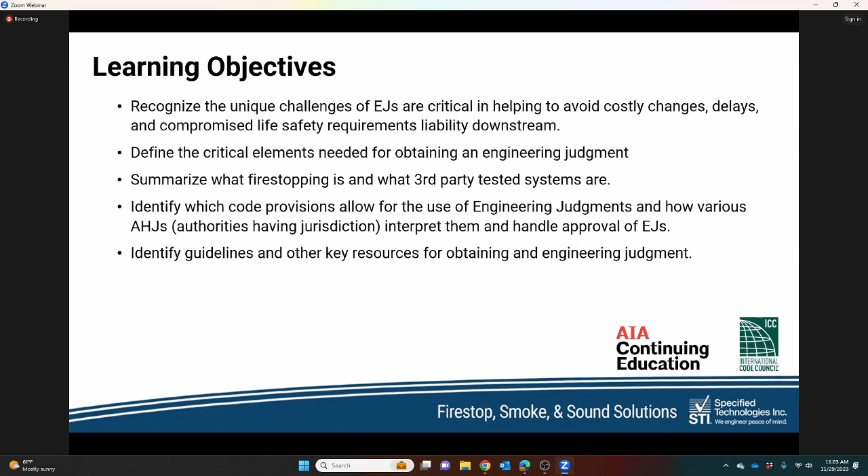So here's the agenda for today. First up, we're going to lay the foundation by understanding the premise of firestop systems, how they're crucial for safety and compliance in various settings. We're going to talk about engineering judgments in general. We'll show you some common applications, what they are, their vital role in firestop systems. We'll explore who's issuing EJs currently, how long they typically take, and how to obtain one.

And then moving on, we'll get into what stamping of EJs means and how that dovetailed into some new oversights on engineering judgments. And then finally, we'll show you some real-life examples before finishing up with Q&A and giving you some firestop solutions about how STI can help.

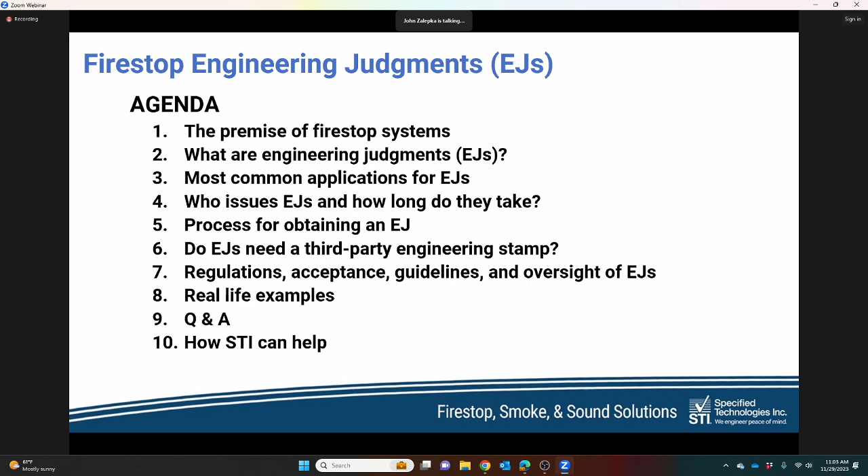So let's get into this. Firestopping systems are designed to inhibit the spread of fire, hot gases, and toxic smoke, essentially by sealing openings in walls, floors, roofs, anywhere there's openings. This is going to include any penetration, things like pipes and cables, ducts, also membrane penetrations when you have maybe a breach in just one side of an assembly, like an electrical box.

And of course, your different types of joints, whether that's an interior finish, gypsum wall joint, masonry joints, or at your perimeter with your curtain walls. The building codes are going to mandate that these systems undergo testing and receive ratings as an integral part of an assembly following an approved test standard that we're going to tell you about.

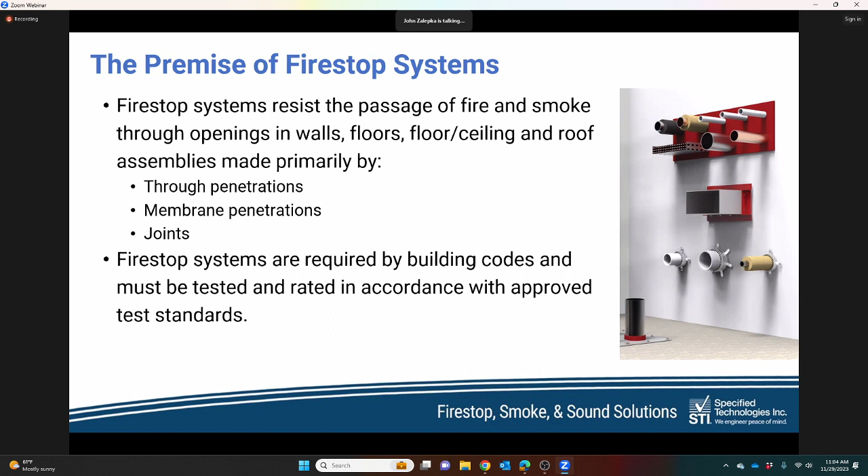So here we see some common examples of firestop applications. We can see a plastic pipe penetrating a gypsum wall, a curtain wall joint at that edge of slab. We see a typical header wall joint here where the gypsum board meets the underside of a steel fluted deck.

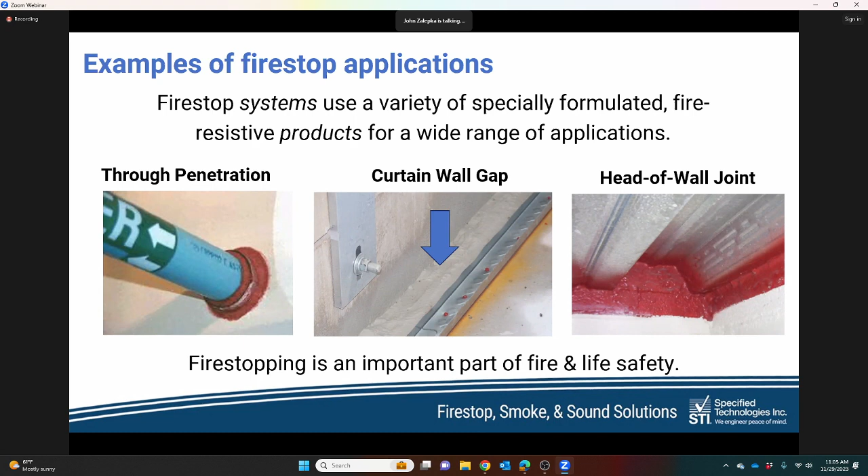These firestop systems use a variety of specially formulated, independently tested, fire-resistant products, and they seal these penetrations. They're put into your linear joint systems, and they're going to stop the spread of fire and smoke. Again, the emphasis here is on a system. Firestop products are just one component of that system, and fire stopping is a pretty important part of the overall containment of fire and life safety in a building when that does happen.

Firestop systems are tested and listed in independent laboratories. In North America, UL and ULC Intertek are probably the most common, but you'll also see listings for FM Global, and Southwest Research Institute down in San Antonio. All of these agencies have their own published online listings.

In the UK and other countries using British standards, Warrington Fire is well known, and there are many other relevant testing agencies depending on your location. The building codes are going to point to certain standards for fire stopping to be run at these independent third-party labs. The code doesn't say where the testing must happen, only that it must happen to a particular standard, and each of these labs can run to those respective test standards.

So here are those test standards. You'll see there's an ASTM and a UL version of the code referenced. If you think about ASTM, it's going to give you base standards for F ratings, your fire ratings, and your T ratings, temperature ratings. And then the UL version typically builds on that, giving us optional tests like W ratings for water tightness and L ratings for smoke leakage. And there's even some new M ratings for movement.

Essentially, the main test for penetrations is ASTM E814 or UL 1479. For fire-resistant joints, it's ASTM E1966 and UL 2079. Finally, for curtain walls or the perimeter fire containment system, ASTM E2307 is the primary test standard, although E119 is allowed under certain code exceptions. There is no UL version in this case for these tests.

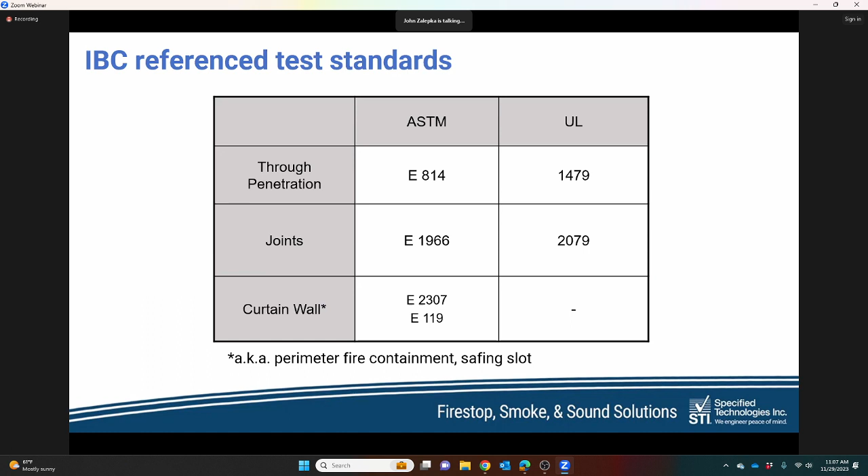So what is a tested or listed system? Well, this is going to refer to a penetration or a joint assembly, again, which is rated per the corresponding test standard that we just saw.

Here on the top portion is a simple pipe penetration system. You'll see the written description on the left-hand side there, it'll help you out. All the elements of a fire stopping system, including the assembly to which it's installed, comprise a specific and inseparable engineered unit that must be utilized as such. Now, the specific elements for each design become integral to the listing. So again, the products don't have ratings. The systems have the ratings.

So in this example here, we could see UL system CAJ1240. It's going to describe all the elements of a metal pipe penetrating a concrete floor or wall. And then with the minimum amount of concrete or the CMU wall, that gives us that combination system. We'll see sometimes there'll be optional steel sleeves, sometimes there's required sleeves. In this case, this one's optional.

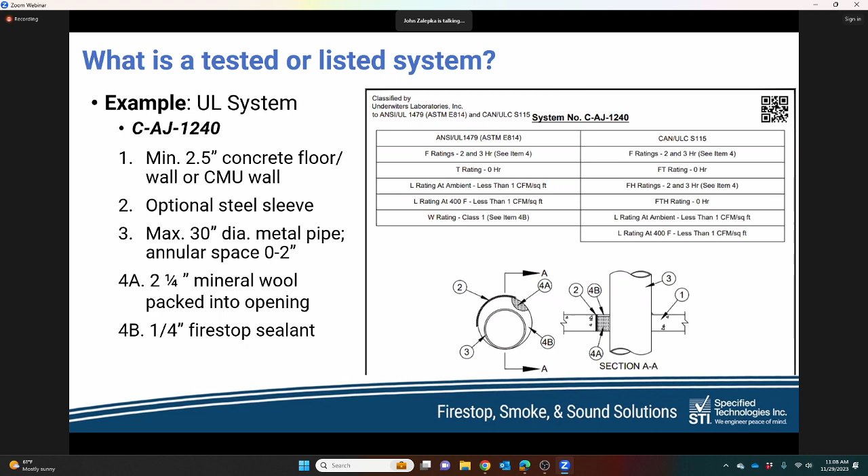This system allows for up to a 30-inch diameter metallic pipe with annular space, that's the space between the outside periphery of the pipe and the inside periphery of the opening, that can be a maximum of 2 inches. With 0, we see that's actually point contact, meaning that this pipe can touch one part of the opening. There's going to be some mineral wool packed in there, and then finally, there's some firestop sealant that's put in there on the top side of the floor or on both sides of the wall.

So now we can see that building codes require firestop systems to be installed and tested in accordance with the applicable standards by qualified test labs. These two sections of the IBC, the International Building Code, are examples. You can see through-penetrations shall be protected by an approved through-penetration firestop system installed and tested in accordance with ASTM E814 or UL 1479.

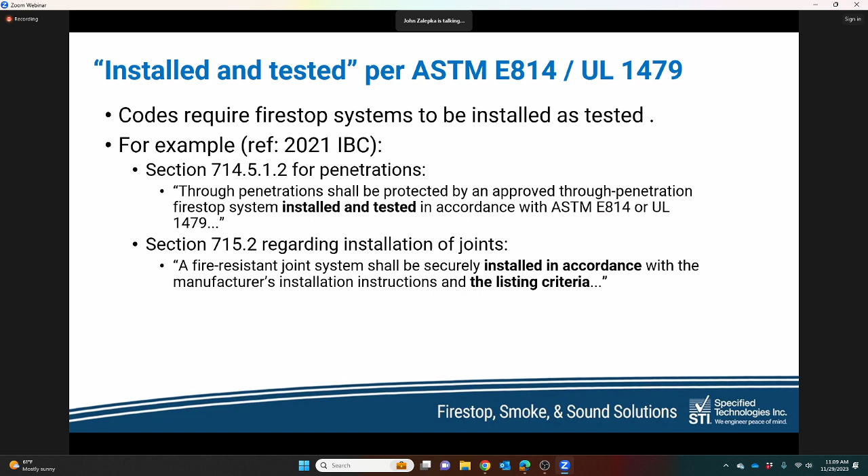And then for joints, you can see it's installed in accordance with the manufacturer's installation and listing criteria. So simply put, install firestop systems the way that they're tested or listed. Simple, right? Each system's like a set of installation instructions. But we can't test everything. There's no way to anticipate and test every single condition that's going to occur during the construction of a project or the life of a building. To put it nicely, unexpected things happen.

Construction is a complex process that requires an incredible amount of coordination and communication. And let's face it, it's not perfect. We all know what happens during the renovation of old buildings when walls and ceilings are opened up or removed. There's always some surprises out there.

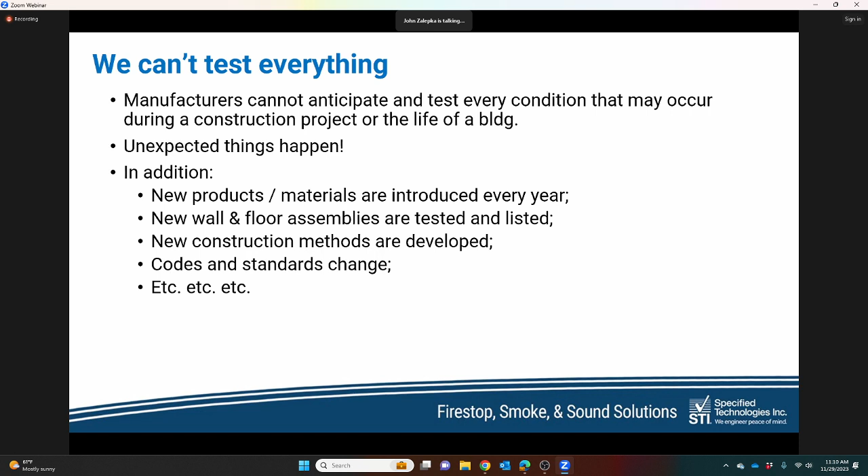In addition, there's always new products and new materials introduced every single year. There's new floor and wall assemblies that are always coming out, and construction methods change over time. Let's be honest, codes and standards also change. There's a 3-year code cycle. So it goes on and on.

So this is the reason why engineering judgments exist. It's because field conditions differ from tested systems. In this example, we have a hole that was cored in the wrong place, so a second hole had to be drilled. Now the opening looks like that little figure 8.

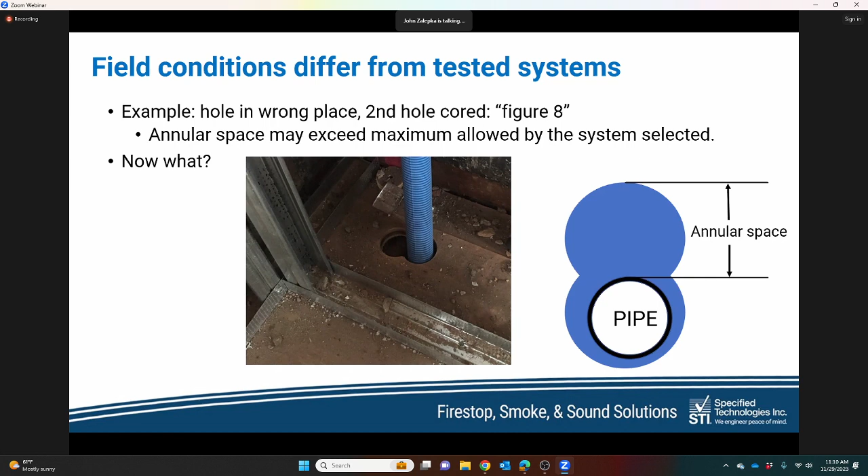We've seen them out there plenty of times, and it may no longer meet the parameters of a tested system that's been chosen for that application, because the annular space—that distance between the conduit and the edge of the opening—may exceed the maximum allowed by the system.

So now what do you do? Well, first of all, you try to find yourself a tested system that does satisfy the field condition. You can look on UL's website called Product IQ, Intertek's directory of building products, or even manufacturers' websites. Or you can contact the firestop manufacturer directly. In the case of that figure 8 example, there are systems available for larger openings.

However, on almost every single job site, situations do occur during construction for which there are no tested systems available. So then you move on to step 2. If there's no tested system for the condition, either modify the condition—easier said than done a lot of times—or request an engineering judgment.

When I say modify the condition, we mean something construction related: move a pipe, reduce the size of an opening, extend a wall, move a penetrating item. There are so many different things, but modifications aren't always possible and they're not typically practical. And that's why we as manufacturers get called for engineering judgments to be requested.

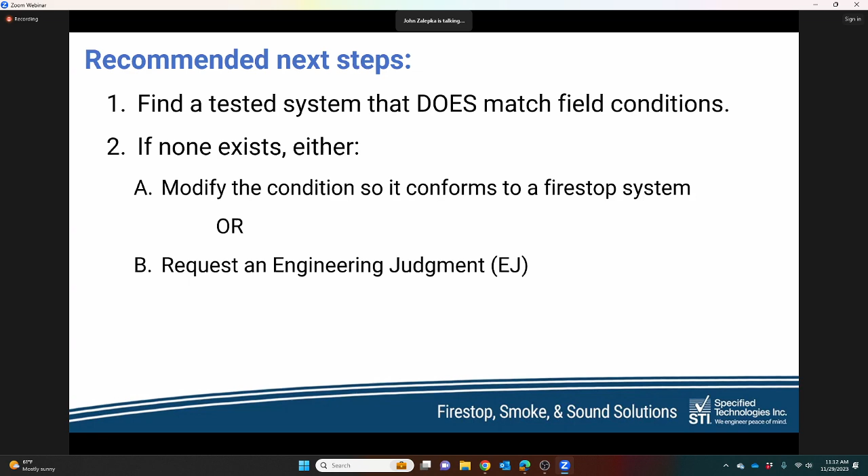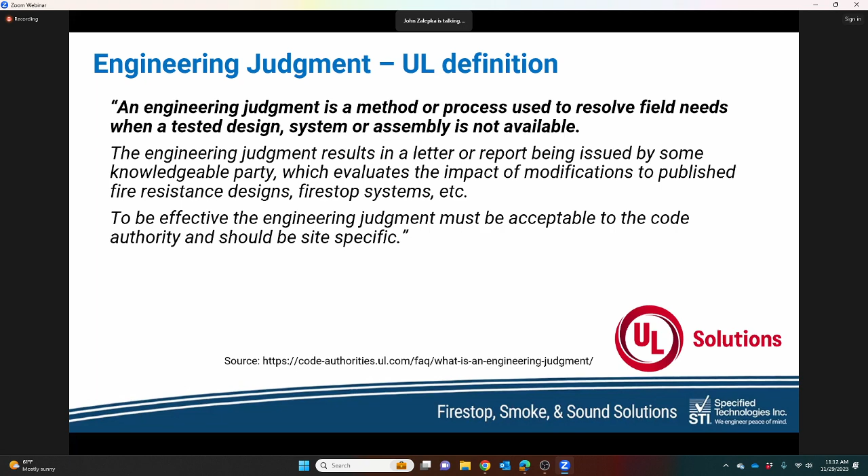So there are several different definitions of engineering judgments. UL's definition, found on their website, is broader than just firestop systems—it addresses any fire-resistant design, assembly, or system. It simply states that an engineering judgment is a method or process used to resolve field needs when a tested design, system, or assembly is not available. It goes on to say it should be done by someone knowledgeable, be acceptable to the local authority having jurisdiction, and be site-specific, which is an important part we'll come back to later.

The IFC, the International Firestop Council, also has a definition, which you'll see on the next slide. In fact, the IFC has a multiple-page guideline for engineering judgments, which is excellent. But first, if you're not familiar with this organization, IFC is a not-for-profit association for manufacturers, inspectors, and users of fire protective materials and systems. It's a terrific source of information on all things fire stopping.

The IFC has a document available on their website called Recommended IFC Guidelines for Evaluating Firestop System Engineering Judgments. Within these guidelines there's a definition of engineering judgments. To paraphrase, it says: when field conditions differ from original design purpose, alternative methods—sometimes referred to as engineering judgments or EJs—apply. In Western Canada, EJs may commonly be known as TEs, or technical evaluations. We'll get into the different names for that a little bit later.

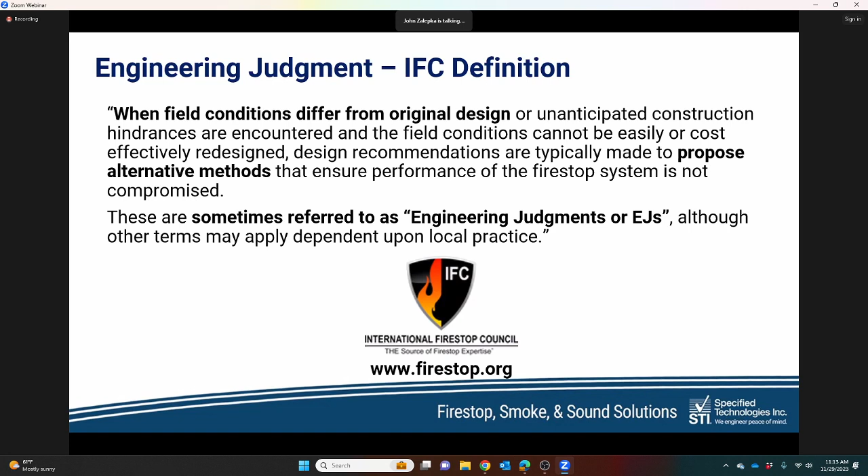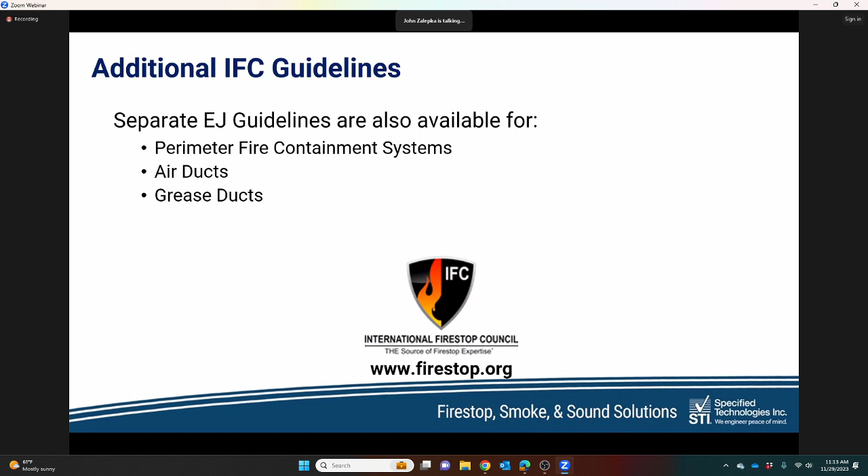The IFC also has EJ guidelines specifically for perimeter fire containment systems—that gap between the edge of slab and your exterior walls—air ducts, and grease ducts. However, for the purpose of this webinar, we're going to focus on firestop systems, which include penetrations, joints, and perimeter fire containment systems.

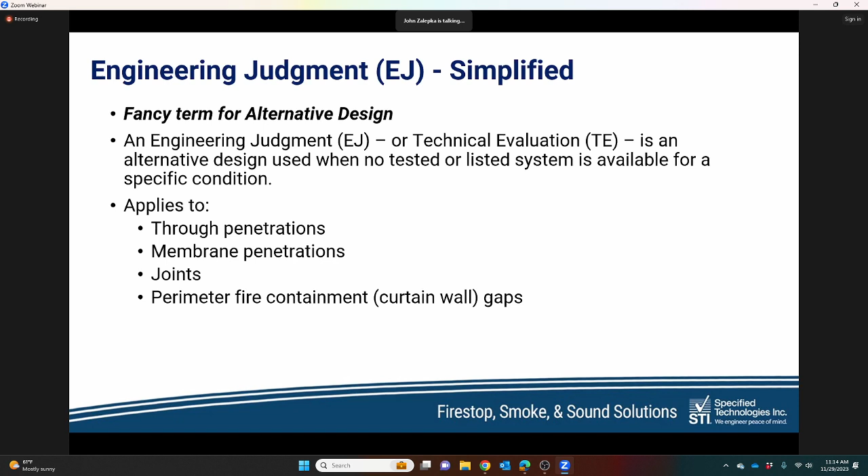So I like to think of engineering judgments as just a fancy term for alternative design. EJs are a really quite simple concept, but it's important to understand how they're done and by whom, as well as the regulations that affect them, because they're an important part of fire stopping as well as life safety and liability. No one likes that word.

But let's talk about the building codes for just a minute here. Although the codes do require firestop systems to be tested in accordance with approved standards, alternative designs are allowed in IBC section 104.11. Codes are not designed to restrict the use of material, design, or method. However, alternatives must be approved by the building official. So although alternatives are discouraged in favor of tested systems, there are situations where they can't be avoided.

Take CLT, or cross-laminated timber construction, for example—it's also your heavy timber, your mass timber—and we'll see CLT construction is now allowed by the IBC for high-rise buildings.

However, at the same time this was published, there were no listed fire stop systems available for CLT. Fire tests were in progress by manufacturers, but it's more challenging compared to using concrete, masonry, or drywall due to the combustible nature of wood.

So UL developed a new category, which was published in October of 2022. You'll find a limited number of fire stop systems using CLT walls and floors on Intertek's website and UL. But by the end of this year and beyond, there's going to be plenty more. We actually have quite a few that have just dropped.

If you look at IBC section 104.11, it basically states that alternatives shall be approved where the building official finds that the proposed design is satisfactory and complies with the intent of the code, and that the material, method, or work offered is not less than the equivalent of the prescribed in the code. In other words, it has to be at least equal to the code, and it has to be approved by the building official.

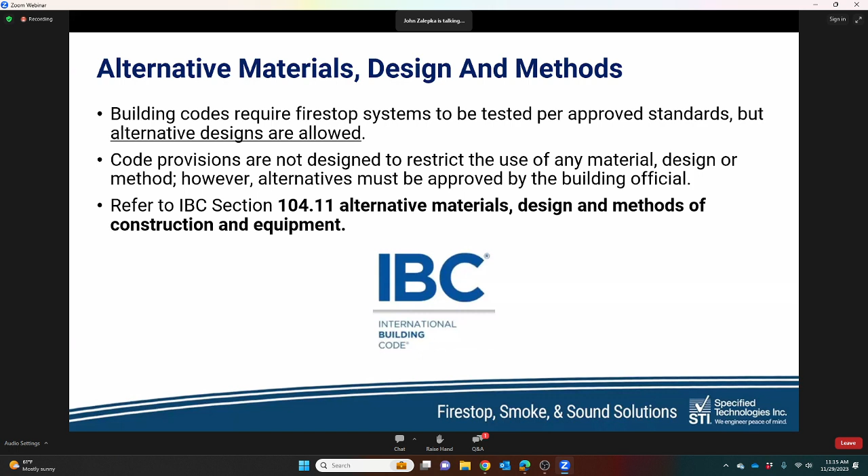In Canada, alternative solutions are also allowed by code, the National Building Code, NBC. Western Canada tends to lead the code enforcement, and if you're in Alberta, Calgary, Edmonton, you're familiar with Standata, a separate organization which publishes information bulletins, guidelines, and reports. If you deal with British, European, or other codes, you're going to find that alternative solutions are allowed there as well. It's good practice to use tested or listed systems whenever possible, but also allow alternative designs when necessary under the guidelines approved by whatever your local authority having jurisdiction is.

So let's get into who issues engineering judgments. Fire stop manufacturers typically issue them upon request, and there's typically no charge for this. It's part of the business. However, only qualified technical personnel should issue them.

EJs may also be issued by architects, fire protection engineers, knowledgeable registered professional engineers, or some independent testing agencies that provide listings for services like fire stop systems, like UL or Intertek. Some architects are also very knowledgeable about fire protection and design alternative elements for construction on a pretty regular basis. But with firestop, it's best to at least involve the manufacturer, because it's the manufacturer that knows how their products behave in a fire, as well as the full test assemblies, because let's face it, that's what we do. We conduct or witness fire tests all the time.

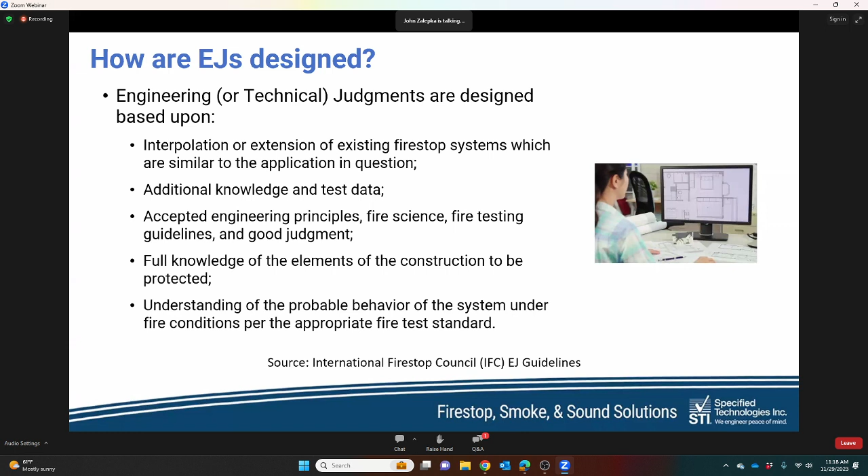So what do engineering judgments look like? We're going to show you some examples in just a moment, but they all look pretty similar to tested and listed systems. However, they should be clearly identified as engineering judgments. They're normally presented as one or more illustrations with a detailed description, just like a fire stop system, but illustrations are not required, and they may be in written form only. There's no rule that says you have to have a drawing. Again, most do, but it's not a requirement.

But an EJ should also include a clear direction for the installation of the recommended system. What was it based off of? Cite the tested systems again. Identify the project name and location. It's very important that this has to be site specific. It can't just be a general engineering judgment, as well as the company that it was issued to. So who's the responsible party?

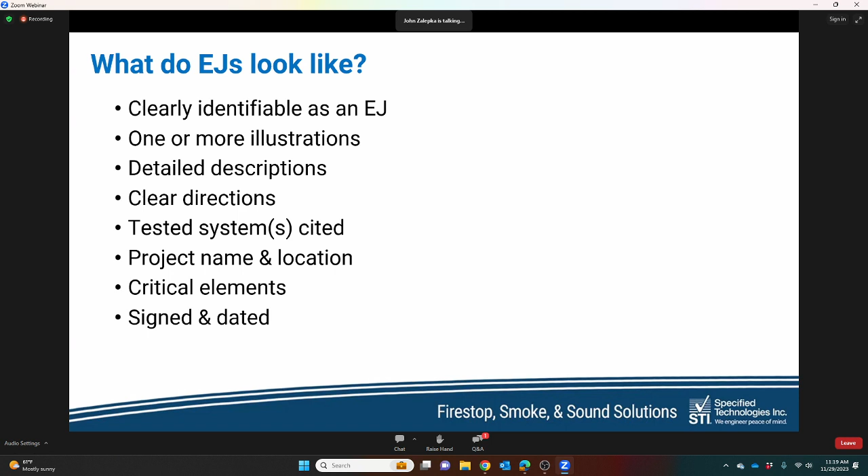It needs to provide a complete description of the critical elements needed for the fire stop configuration, and it needs to show the date, the issue, the signature, and the person's name that issued this engineering judgment.

So here we could see an example of an EJ that was done for a pretty large opening with multiple insulated pipes penetrating a 2-hour shaft wall. Generally shaft walls shouldn't be penetrated, but sometimes it's necessary or it happens. So there are tested systems for insulated pipes through shaft walls, but they're pretty limited. In addition, these were steam pipes, and the insulation was up to 4 inches of fiberglass, which is unusually thick.

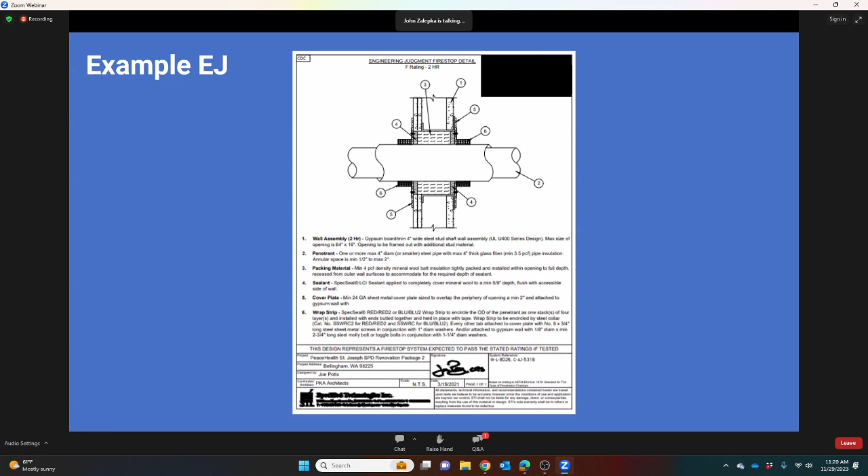So at the top you can see a drawing, the fire rating — 2 hours in this case — and the engineering judgment number, which has been hidden for confidentiality. The main reason for this EJ was the insulation type and thickness. Glass fiber insulation breaks down in fire, and if it's not fire stopped properly, it can allow the fire to spread through that wall.

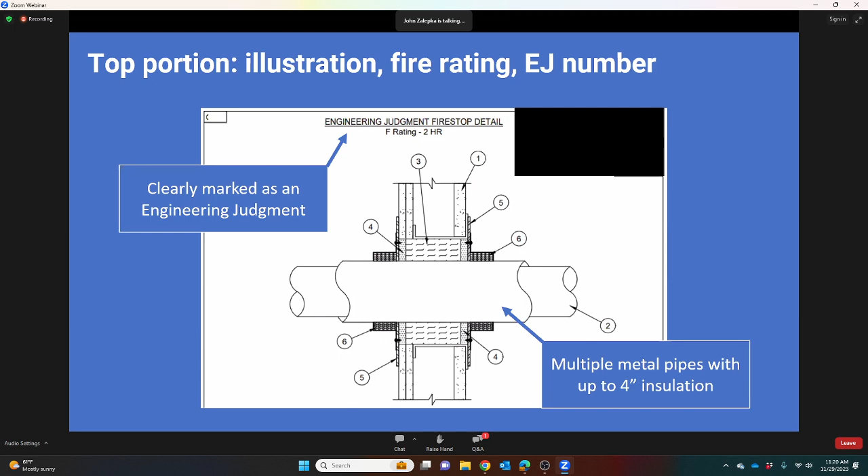So fire stop collars were required around the pipe in this case, and these collars are going to expand into the mess. When the fire hits it, it's going to close those gaps left by the consumed pipe insulation and any gypsum wall that may have broken away.

So in the middle section, the engineering judgment has all the written descriptions — the wall assembly, what it's made out of, the penetrant, packing material, any sealant, the steel cover plate, and in this case the wrap strip with the steel collars.

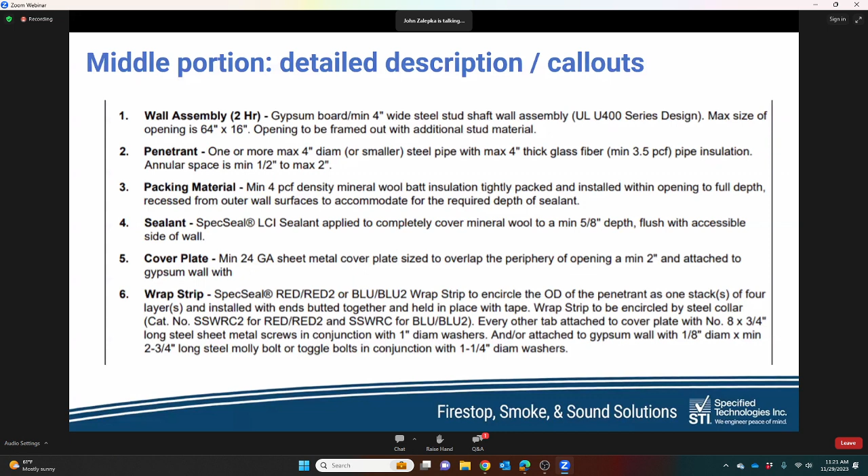And then finally, the lower section looks a little bit like this, a title block. It's going to contain information including the project name and location, the engineering judgment designer, the responsible party — usually a contractor or an architect — the signature, the date, and again any referenced fire stop systems that judgment was based off of.

But if you asked our engineering team about this, joints and curtain wall systems seem to take the most time. They are the most complex, the most difficult situations to deal with, and there's a lot of different variables when it comes to those joint systems.

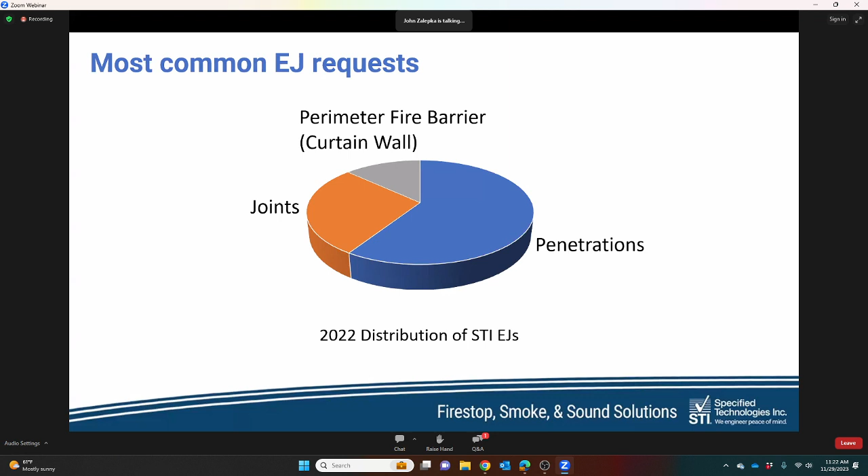So how do you submit a request for an engineering judgment when you can't find a system? Most manufacturers are going to have some type of standard form, usually online. However, each company is different, so just ask what their process is. A standard form can act like a checklist — it could help you collect all of the relevant required information.

In a minute we'll show you what's required for each type of application, but in addition to information you can provide — such as plans, photos, sketches, notes — anything would help a great deal. Any information you could give to understand the situation better will provide an accurate EJ for you that's going to reflect your actual real-world field conditions.

So what information do you need to request an engineering judgment? Well, first of all, EJs again have to have the name and the address of the project. I can't stress this enough — we can't just write a blanket engineering judgment. Remember, codes require EJs to be project specific as well. It can't be reused on different projects without submitting it for review with respect to that current project in question.

A lot of times people try to get EJs written before a project even starts. That should never happen. All EJs also should note the responsible party — for example, if it's an architect, an engineer, or the contractor, even a building owner sometimes in the case of maintenance work or remodeling. Now, for penetrations, you're going to need to know the type, the thickness, and the fire rating of the wall or floor that you're penetrating.

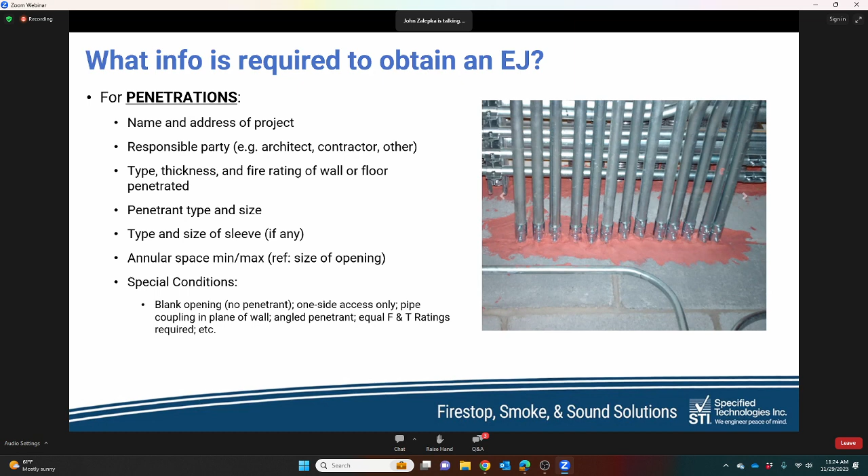Maybe something was cored and you didn't need it. Maybe a pipe was taken out. If you only have one side access, this is helpful to know as well. Pipe couplings, if that's in the plane of the wall, any type of angled penetrant, equal F&T ratings required, anything that we need to know to help you along there. That's what we would need for penetrations.

When we're dealing with joints, this is what we would need to know when you are looking at joints. Again, name and address of the project, responsible party. Then for joints specifically, we need to know the type of the joint. Is it a head of wall joint, a wall to wall joint, floor to wall, bottom of wall?

What is the type and thickness of your different assemblies? What are they? You need to know what these adjacent assemblies are. Is it a brick wall going to a gypsum wall, or the underside of a floor? What is the joint width? And then again, any special conditions here with joints, typically they are designed to allow for movement. So what is the movement capability of the joint?

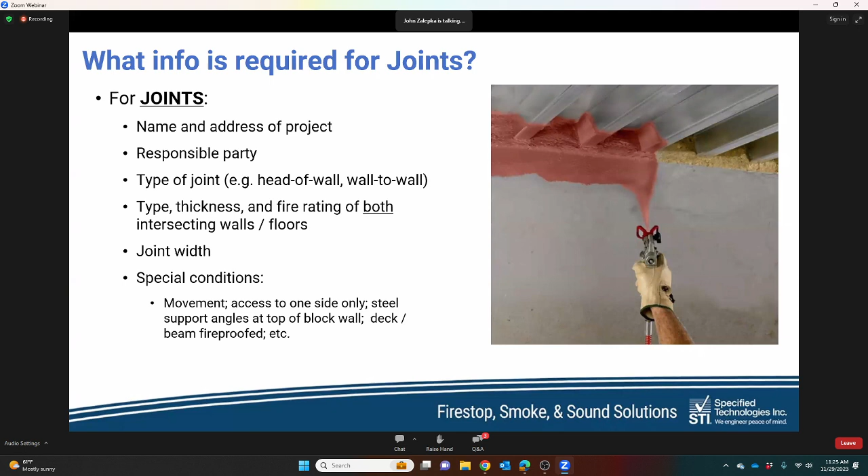Access to one side, again, if you only have one side access, sometimes the answer here is a stuff spray kind of thing. Any kind of steel support angles on the top of a block wall that might be in the way. If there's fireproofing on a beam that might be penetrating somewhere, all of this we need to know.

And then finally, for your perimeter fire containment systems, EJs, we always start with the exterior wall. One of the assemblies here is not rated, and that's typically that wall that's made up of things like aluminum that melts and glass that breaks. So what is that wall made out of? We need to know, is it precast, GFRC?

What type of floor are we dealing with? And the thickness of that floor. What is the fire rating of the floor? Typically, you have 2-hour, but sometimes you have a 1-hour floor. Sometimes you have a 3-hour floor. So need to know the rating of the floor.

Joint width, obviously, this is going to factor into how we're going to deal with that little gap there, or maybe not so little. Any sill heights, special conditions, again, your movement here, wind sway, dynamic, static. Sometimes your curtain walls can be a static system. Do you have anchors that are mounted on the top? Are they in the middle? Are they bottom side anchors, steel back pans?

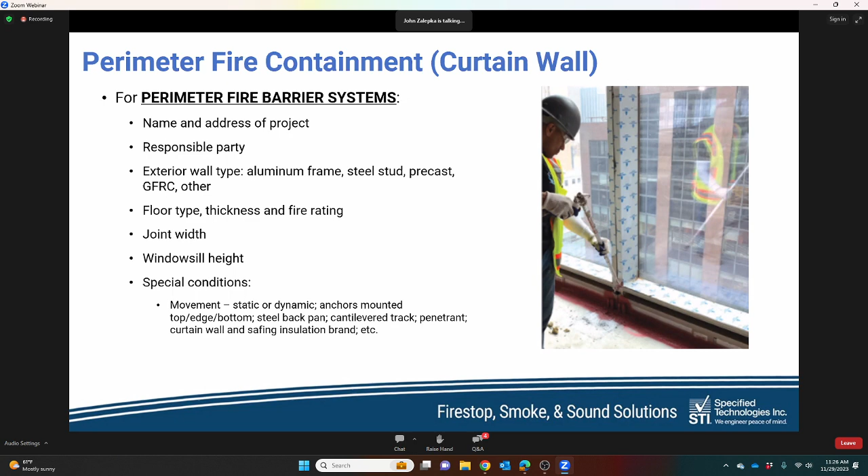Again, anything that you could tell us about that panel and any conditions of the floors will help us along the way.

So how long does it take to get an EJ? Well, this is going to depend on a lot of different factors, but when you're in the middle of a project, EJs can cause construction delays that, if not handled efficiently, really could put a damper on the profitability of your job. So we understand as manufacturers that turnaround time is very critical, but it's always going to depend on having the most clear and complete information.

This is the number one reason for delays. The complexity of the application is always going to factor in there. The efficiency of your manufacturer's process and their technical personnel, the volume of EJs at the time of request, any number of changes, corrections going back and forth, and any number of factors could really take some time there.

But STI, we've set the bar pretty high in the industry. We typically turn around EJs in 24 hours or less. In fact, there's many that turn around in just 2 or 3 or even 4 hours. However, there's times of years that are busier than others. For example, March and April tend to have a pretty high demand for EJs.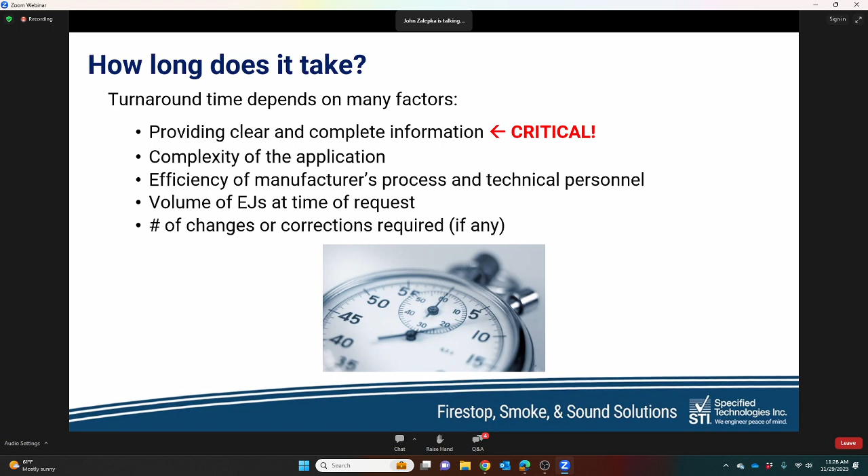So when you make a request, try to put yourself in the shoes of the other person who's designing it. If they don't have all of the information, they're not on site, so they don't have that advantage. So they're going to rely entirely on the information that you provide. So again, use details, photos worth 1,000 words, right? Notes, hand sketches, very helpful in understanding your actual field conditions. And this is critical in order to design an EJ that meets your needs and satisfies the code.

So do EJs need to be stamped by an engineer? This is a great question. And the answer is generally no, but it depends entirely on the jurisdiction. Some AHJs do require a licensed engineer, and in some cases, a fire protection engineer, to review and stamp your EJs. On this slide, there are a few examples of this, but again, this is not an exhaustive list.

Requiring EJ stamps is a strong deterrent against the use of them due to the time and the cost. And if you ever wonder why jurisdictions require this, the reasons are going to vary, but the predominant theory is twofold. The first is simply to discourage the use of EJs, and two is the lack of trust in those who are providing them. Now, that doesn't mean that they don't trust manufacturers in general, but it only takes one bad apple to spoil the bunch. In other words, it only takes one person who may not have been qualified at some point in time to issue an EJ, and now there's this bad spiral, bad loop.

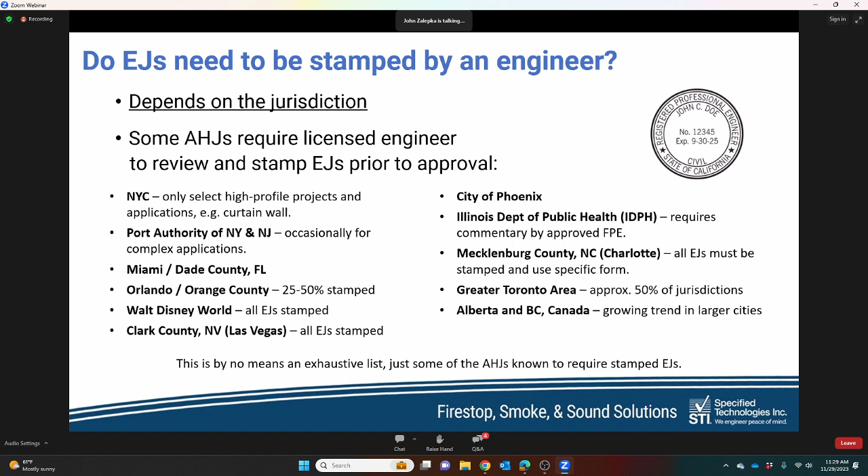So here you can see some of those jurisdictions, and the cost of getting EJs is going to vary depending on the engineering firm as well as the complexity of the application. In our experience, we've seen engineering judgment stamps for around $600 to $1,000, but I've seen them top $1,500. For example, imagine a large project where you have 100 EJs; it could be $60,000 or more just for the review and stamping of those EJs.

So why don't manufacturers just stamp them? Well, the reason is the manufacturer is not considered an independent third party. So when needed, we can refer you to some engineers who provide the review and the stamping that are licensed in all 50 states. Some of them are licensed internationally as well. So if you need that, just reach out.

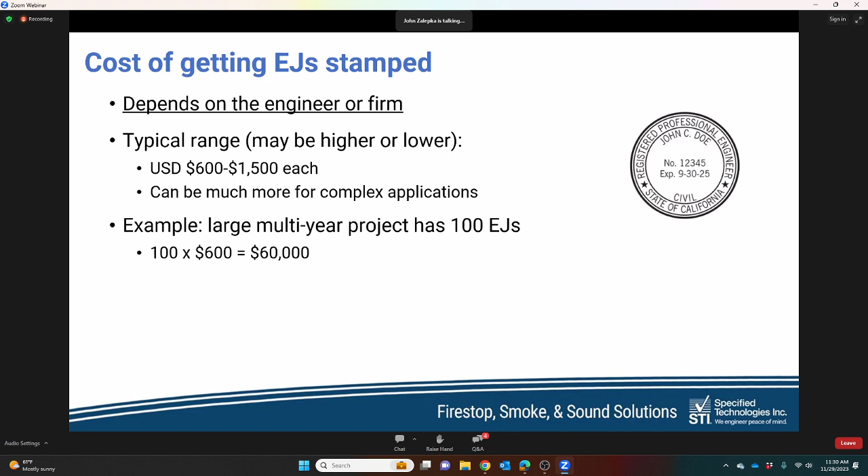There are some AHJs who do not allow EJs for new construction. Again, I mentioned this. Sometimes we're asked to do an EJ before building even starts. So this isn't going to happen in certain jurisdictions, at least during the design and the permitting phase. Now, contrary to what you may think, most building officials are pretty reasonable. We've all heard some stories about some that weren't, but in my experience, most are pretty agreeable to reasonable solutions when problems occur during construction.

But for new construction, one reason some jurisdictions stopped accepting EJs is that too many plans were being submitted for new buildings with dozens of EJs before construction even started. This goes well beyond firestop, and they just grew tired of this, and who can blame them? Their job is to enforce the code, and in many cases, the code was being ignored and substituted with less expensive alternatives as part of the original design. So from that point of view, it's easy to understand why a building official might have that position.

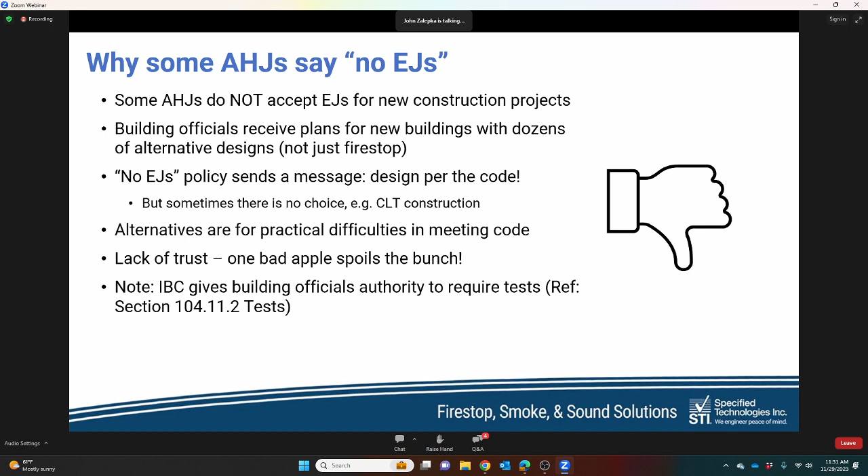EJs are meant for situations where there's no tested assembly, and theoretically, that should only occur during construction, where all kinds of unexpected things happen. But nothing's that black and white, and every project and every jurisdiction is different.

So now let's take a look at some real world examples of recent EJs. This was an example of an existing prison where the AHJ was very strict on code enforcement. The wall was a shaft wall, so there was only access from one side, and the joint was concealed by a continuous steel angle and fireproofing. You'll see that better in the next slide, but you might look at that and think there's enough for a 2-hour rating, but there's no tested system for it. And the area above the wall was concealed, so no one really knew what was behind that angle. This is a good example of good notes and a clear drawing, and it's very easy to understand the basic situation here.

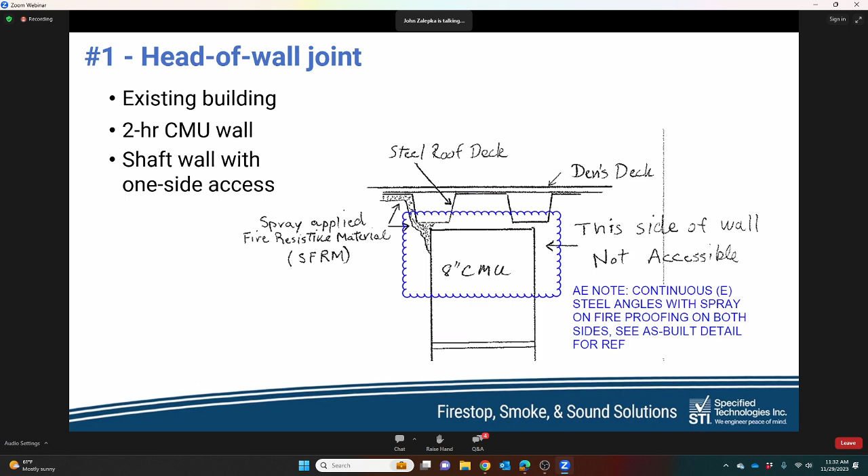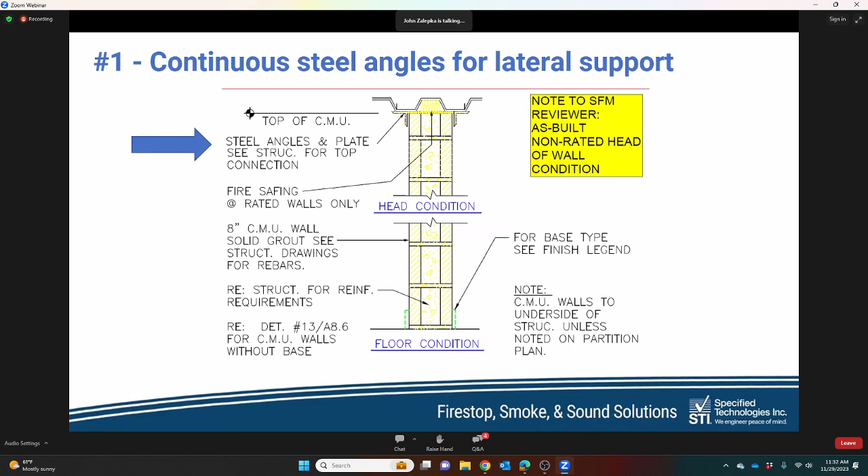Here's some additional information that was provided. It shows that steel angle at the top of the wall. They were installed for structural connection and inmate security. It's a pretty dark photo, but if you look closely, you'll get a sense of the condition that they were facing. There's some missing fireproofing, as noted there. The head of wall joint is also covered with spray-applied fireproofing. So the goal was to provide 2-hour continuity of the wall all the way up to the underside of the roof.

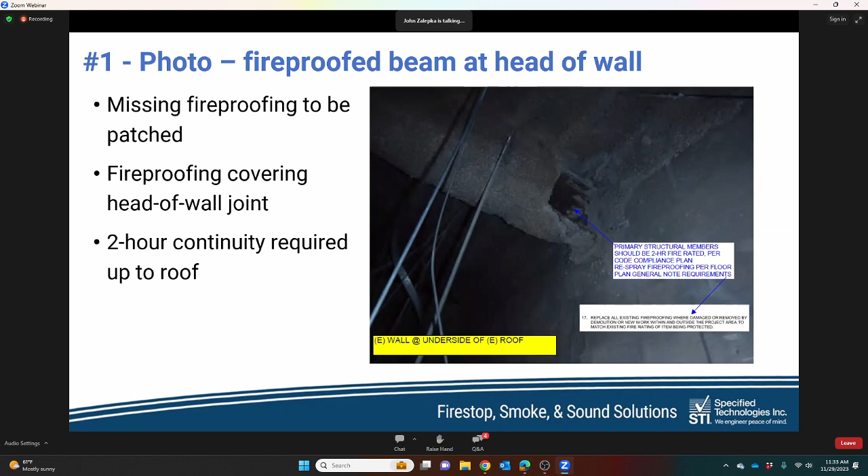So the solution in this case, which was a collaborative effort with the architect and the contractor, was a gypsum shaft wall construction like a soffit with fireproofing where it meets both the wall and the underside of the roof. The steel angles were not touched.

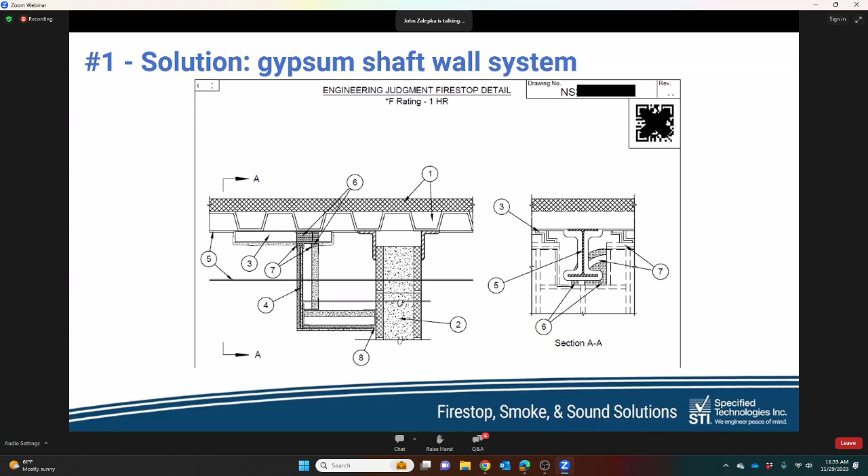So here it is in a little bit more detail. You can see that there was a sandwich type of fire stop system. Again, which I mentioned a little bit earlier, stuff spray. You had some mineral wool backing and fire stop spray above your shaft liner. And then you had some fire stop sealant down there at the bottom.

So this system took some back and forth to get all the details correct, to satisfy the fire marshal and to be confident that it could be constructed properly.

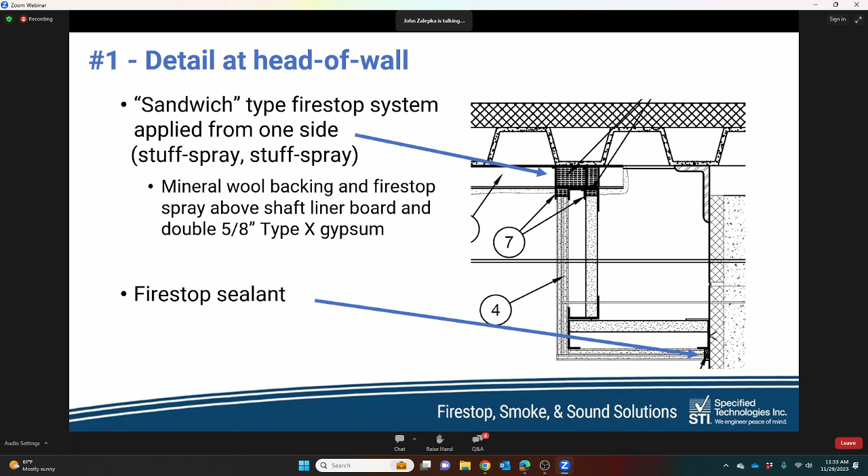So here's another example. This was a relatively simple condition once you understand it. You're looking at an elevation view of an exterior window wall with GFRC spandrel panels, and the gap is between the edge of slab and the wall. It was about 8 inches wide, and it was filled with fire safing or mineral wool. Looks pretty good on the surface, but there were 2 issues.

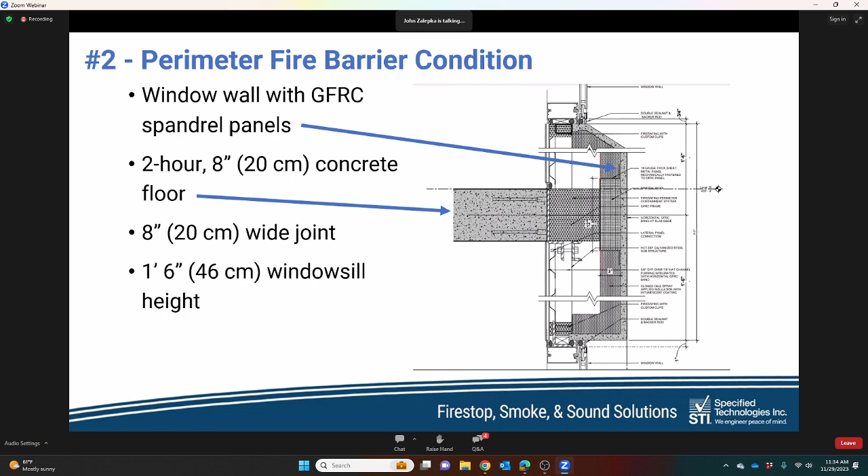First, there's a metal panel fastened to the inside face of the GFRC panel. It's filled with mineral wool, but that's not part of any tested system. And number 2, although there's fire safing in the joint between the edge of slab and the metal panel, the density and the compression were not called out, and there's no fire stop sealant or spray for your smoke seal, as well as fire and hose stream resistance, which is part of the test.

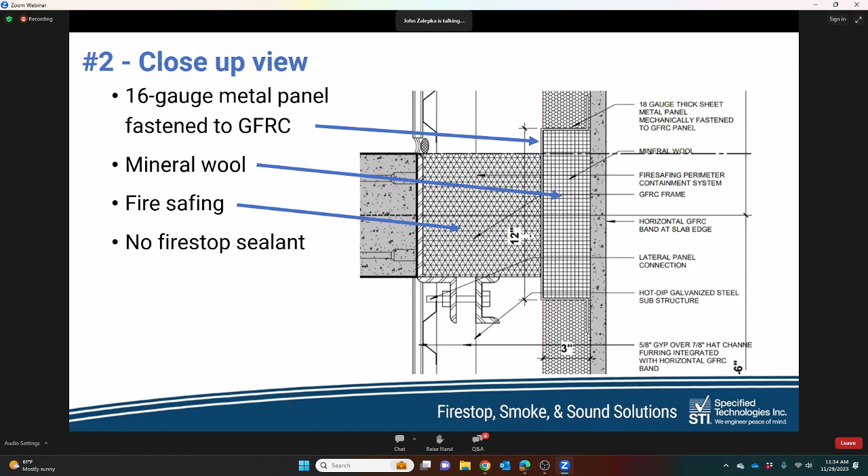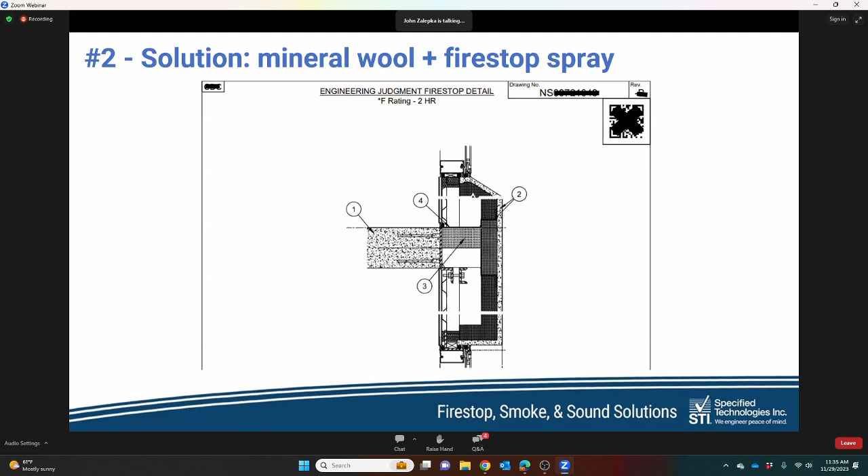So the solution in this case was essentially to add a Firestop spray over the fire safing and call out the mineral wool density and compression. So the next slide will show us that in a little bit more detail. We see here there was a minimum depth of 4 inches of mineral wool with a 4-pound density, and it was required in the joint to be compressed at 33% between the edge of slab and that metal panel, and then sealed on the top with a Firestop spray.

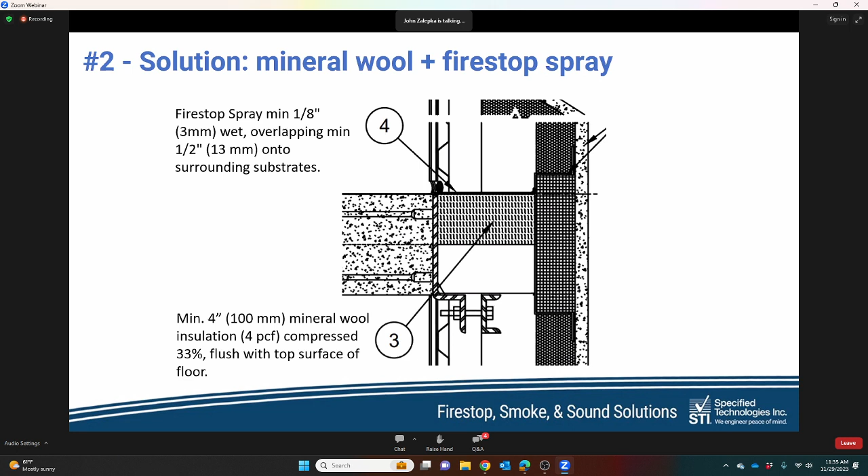Here's our third example. This is a membrane penetration. In this situation, there's a 2-inch diameter steel conduit penetrating one side of an existing wall made of lath and plaster. The wall consisted of 7/8 inch plaster on metal lath on both sides for a total wall thickness of 5 inches. The building was an older hospital.

It was built, I believe, in the 1950s, just before drywall started replacing lath and plaster as a quicker and easier installation option. And since modern-day Firestop testing didn't begin until the mid-1980s, there aren't any tested or listed Firestop systems using plaster walls. However, that doesn't mean that plaster doesn't have a fire resistance, because it does. In fact, the IBC has a table of the rated fire resistance of various walls and partitions, including plaster. So if you're interested in learning more about that, refer to IBC sections 719, 720, and 721.

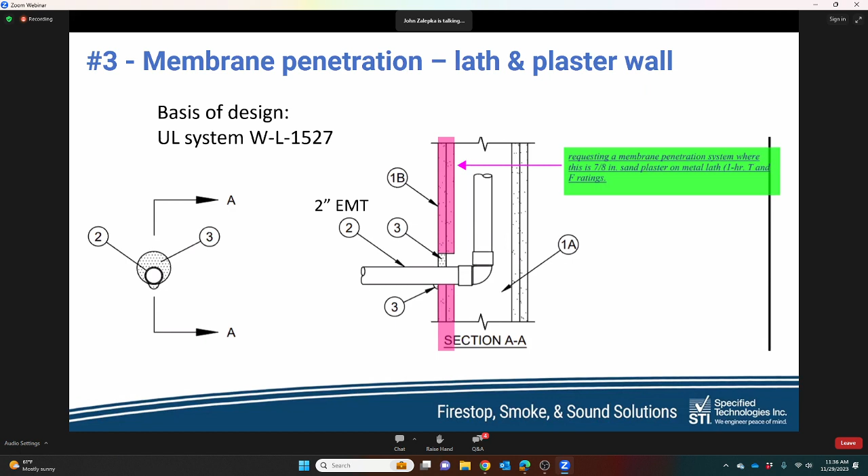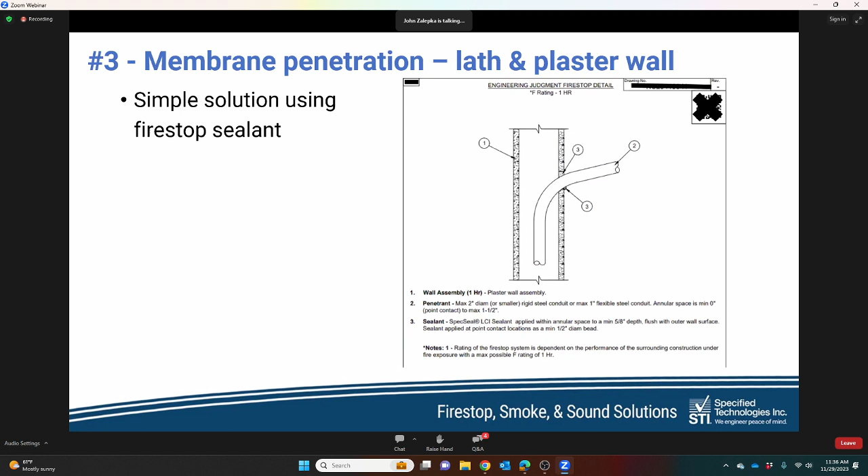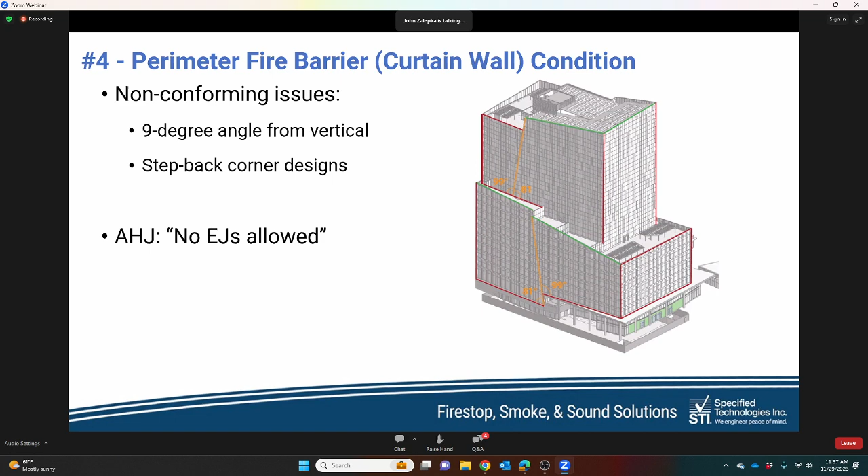So the last example here, this building had some curtain wall conditions that did not conform to any existing system due to angled walls and some special corner designs, and code enforcement on this was very strict. In fact, the building official was not accepting any engineering judgments, but we tried anyway because we were confident we could provide a design that would pass 2 hours and convince the building official that it would perform well.

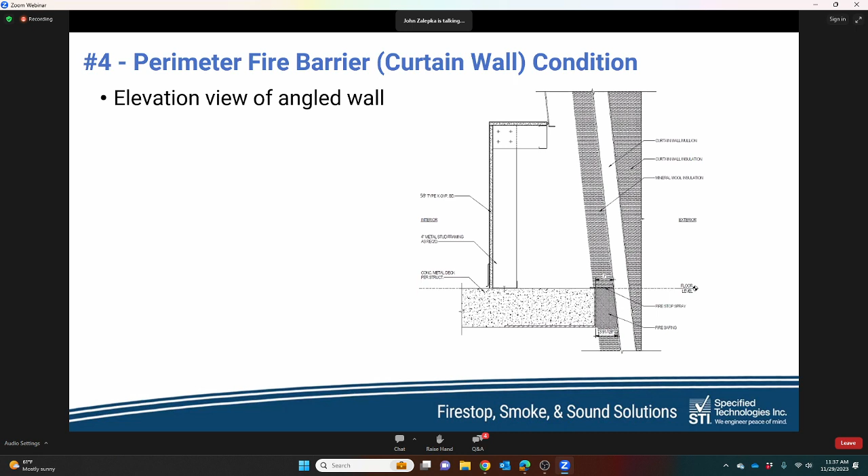Here's an elevation or a side view of that angled wall passing by a concrete floor. And here's a plan view looking down at a typical floor, showing a step back corner. The darker shade part is the joint between the floor and your curtain wall. There were also 2 different types of glazing systems planned for this project. You can see those here.

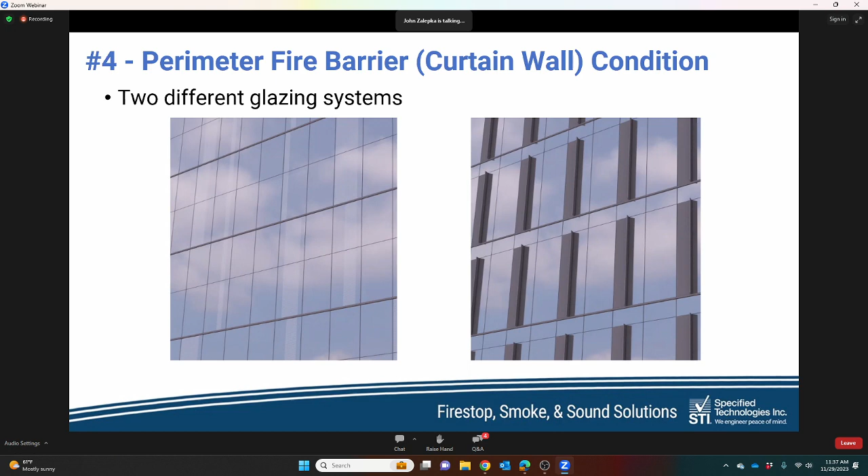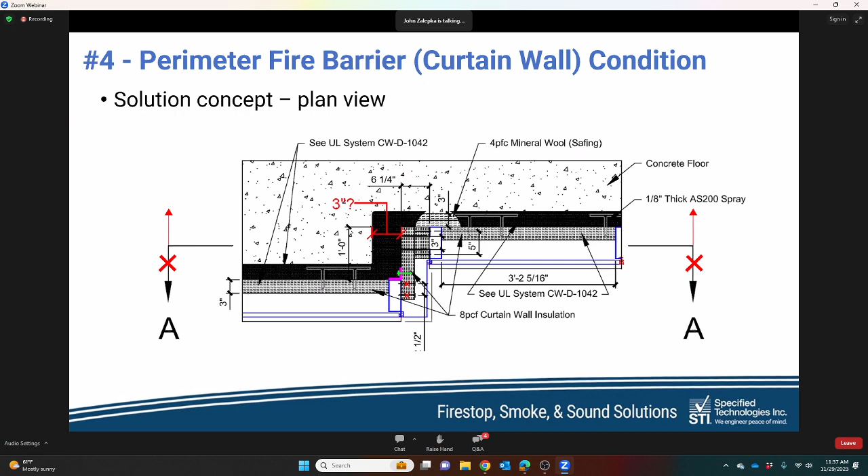So this is a draft of a solution. At this point, we were still collecting information from the architect and the general contractor and going back and forth on a proposed design. You can see some of the redlining on the drawing. This was not a final design yet. We felt the condition was reasonably similar to other tests that had been done.

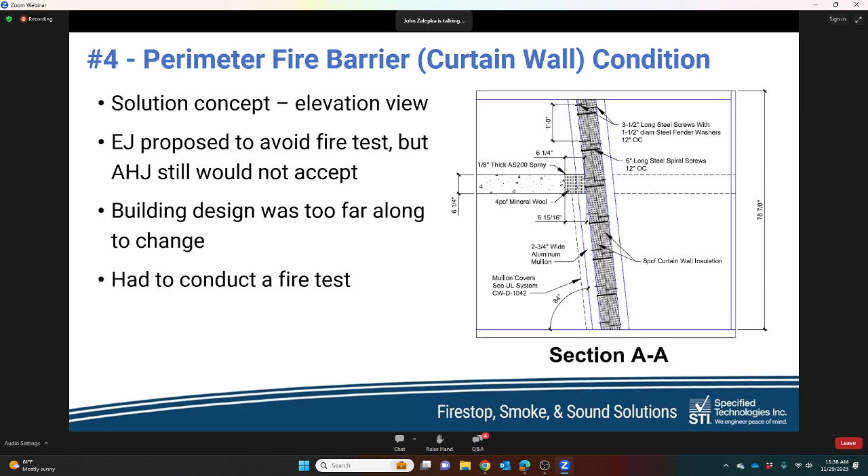So as a group, between the GC, the architect, curtain wall manufacturer, and STI, we proposed an EJ that made our case to the building official to avoid having to do a test, but to no avail. The request was denied. So there was no choice but to do an actual fire test because the project was too far along to change the design of the curtain wall.

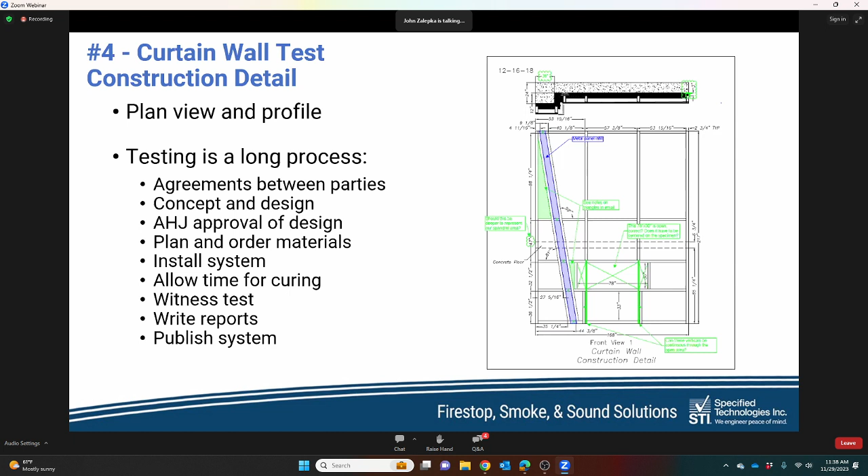So we designed a test and moved forward. This was the curtain wall construction detail. You can see the step back corner at the top and the angled wall there in the larger drawing. Testing curtain wall is a long and expensive process to complete. So this part of the project was delayed for months while the test was being done.

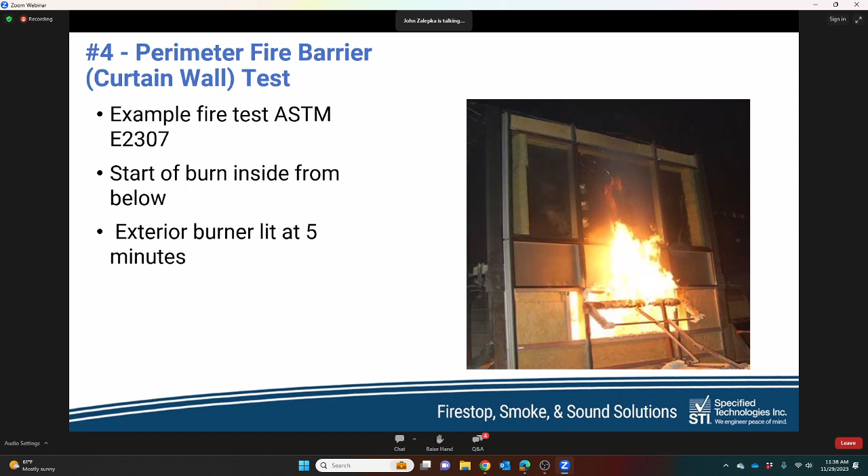So if you've never seen a curtain wall test, this is what it looks like. It's a 2-story apparatus with 2 burners. The interior burners lit first, followed by the exterior burner after about 5 minutes. In this case, the goal was a 2-hour fire rating, but we let it go much longer to just take in some additional data and observation. It was a very successful test.

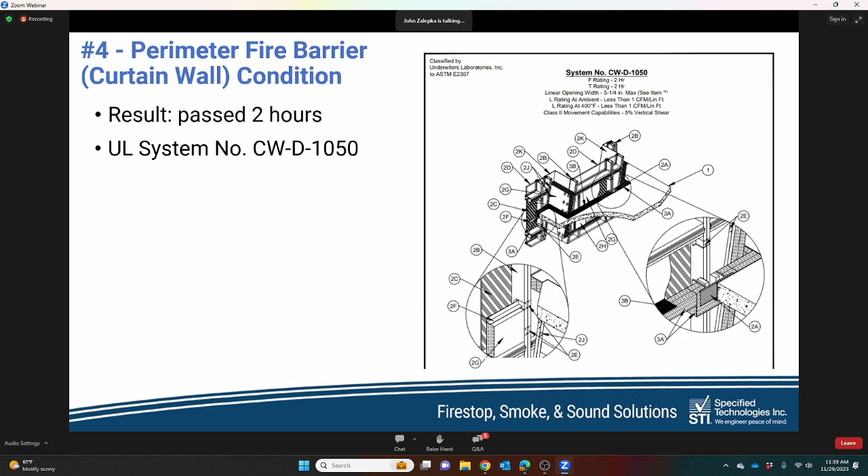So one last point before we test your knowledge and then open it up for some Q&A. There's been some recent trend from code enforcement officials to move away from EJs and to accept only third-party certified systems because they are sometimes issued by untrained and unqualified personnel out there. They have a reduced confidence, so code enforcement officials just don't want engineering judgments. So up until recently, there's been no oversight on the EJ process. So each manufacturer is responsible for their own process, and that's not going to change.

However, UL Solutions, as it's known now, together with manufacturers and others, created the Technical Evaluation Developer Program to take a closer look at those who issue engineering judgments, or what they're calling technical evaluations. So the goal of this program is to create more validity and acceptance of engineering judgments throughout the industry because they are a necessary part of fire stopping.

So if you've been in construction for more than a day, you realize how buildings get built often varies from the intended design. And that's because there's a disconnect between what's acceptable per codes and standards. AHJs may not accept EJs because they want certified or tested solutions. But because we know things don't get built exactly the way they were designed, sometimes we need to find the best possible solution to improve the current state of affairs when issuing or even accepting EJs.

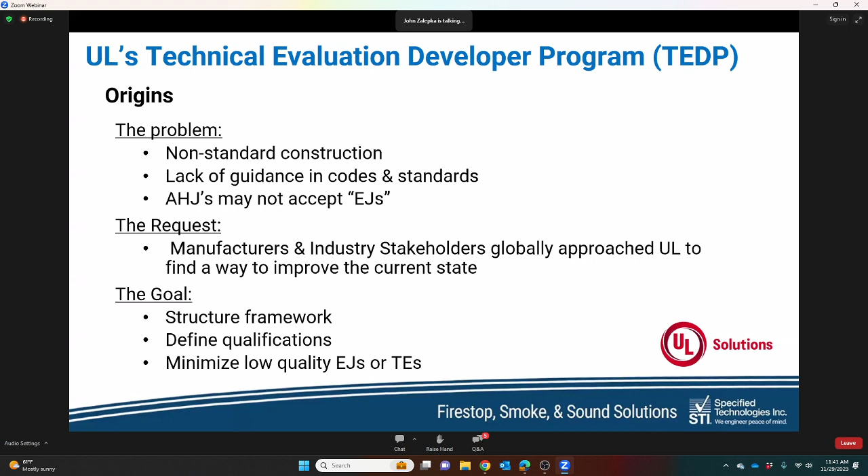So a structured framework and a defined qualification program are going to provide some ease for acceptance. It's going to ultimately reduce the number of low quality technical evaluations in the market, as well as increase testing and certification. So to be accepted into the program, organizations who issue EJs will need to prove that they have a quality management system similar to UL qualified fire stop contractor programs. The audits are going to be conducted by UL's fire barrier field engineering team. They also focus on adherence to the program. This is not a technical audit of the technical evaluations themselves, but rather it's an audit of the process. So non-compliance requires follow-up and may require additional auditing.

And then testing, this is where rubber meets the road. This is a mandatory part of the program. The number of tests is going to vary depending on the number of technical evaluations issued, and it's going to be spread over a variety of industry segments: penetrations, joints, and your fire containment systems. So participants are also required to review their own work on a regular basis to follow up on a formal approval through UL. In other words, the EJs that are repeated are encouraged to be tested. The goal is to reduce technical evaluations wherever possible.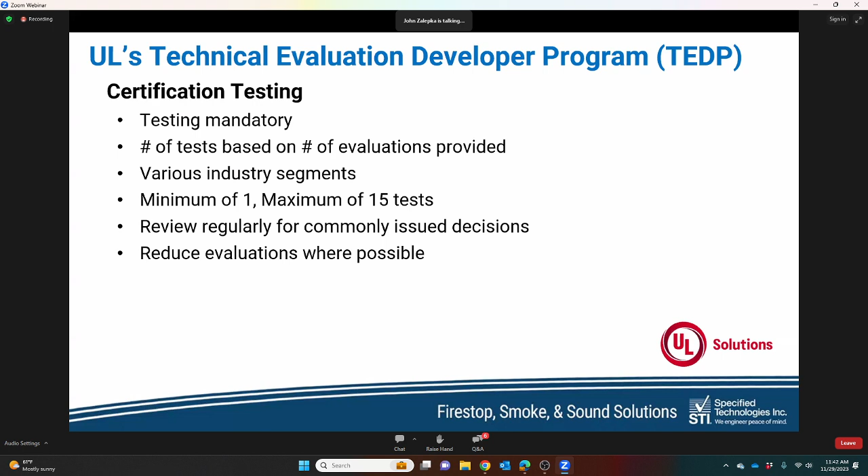But the main point here is that design professionals should be aware of this because you have the ability to include in your language, in your specifications, that you would only allow TEs, technical evaluations, or EJs, engineering judgments, on your projects issued by members of this new UL program. That would ensure that you have a reputable, certified developer and can help make AHJs aware of the existence of this new program.

So at STI, we're proud to say that we are certified, or the people that write engineering judgments are certified under this UL program. And I believe our major competitors are too, or they're right behind us there, but definitely something you should all be aware of.

All right, now we're going to get into test your knowledge to see how well your listening skills were. Anna, are you ready to launch that poll? All right, so I'll read through these questions here and you answer the questions as we go along, and then we'll get into some questions from me after.

So number one, fire stop systems are required by building codes and must be tested and rated in accordance with approved test standards. Is that true or false? Again, we're talking about fire stop systems now.

Number two, which one of the following statements is not true about engineering judgments? Are they a method or process used to resolve field needs when a tested design, system, or assembly is not available? Are they a drawing and description designed by a fire stop salesperson? Are they another term for an alternative design? Or must they be approved by the building official? Again, which statement is not true about engineering judgments?

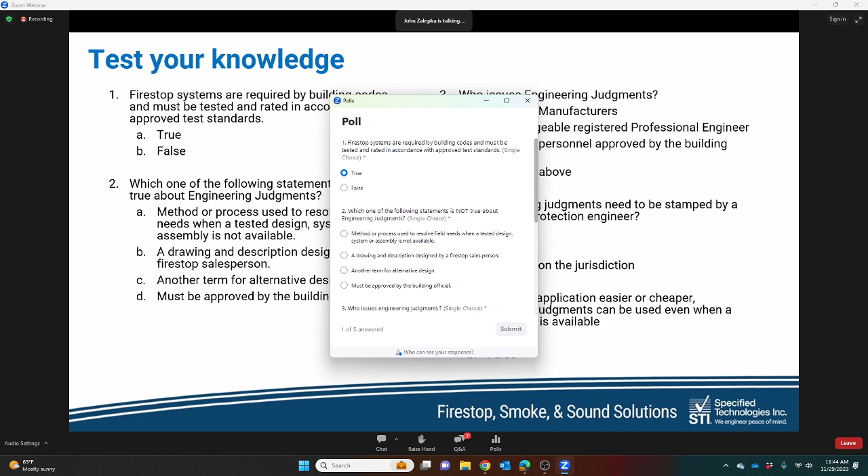All right, number four. Do engineering judgments need to be stamped by a licensed fire protection engineer? Is that a true or false statement, or does it depend on the jurisdiction? Wink, wink. All right, and do engineering judgments need to be stamped?

And finally, number five, if it makes an application easier or cheaper, engineering judgments can be used even when a tested system is available. Is that a true or false statement? Come on, people, I know you know this. All right, we'll give you another moment to answer.

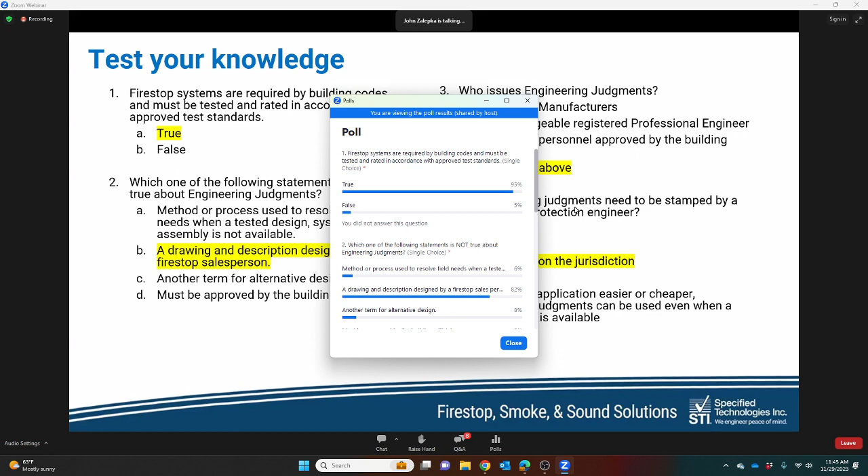Number three, who issues engineering judgments? So 77% of you guessed all the above. You were right. The other 23% of you were not wrong, but the best answer in this case was all the above. Again, manufacturers, engineers, anybody qualified by the building official at this point.

Number four, do engineering judgments need to be stamped by a licensed fire protection engineer? 84% of you got that one right. It does depend on the jurisdiction.

And then finally, if it makes an application easier or cheaper, engineering judgments can be used even when a tested available system is there. That is a false statement. You cannot do that just because it's cheaper. So great job, we're going to give 100% to the group as a whole.

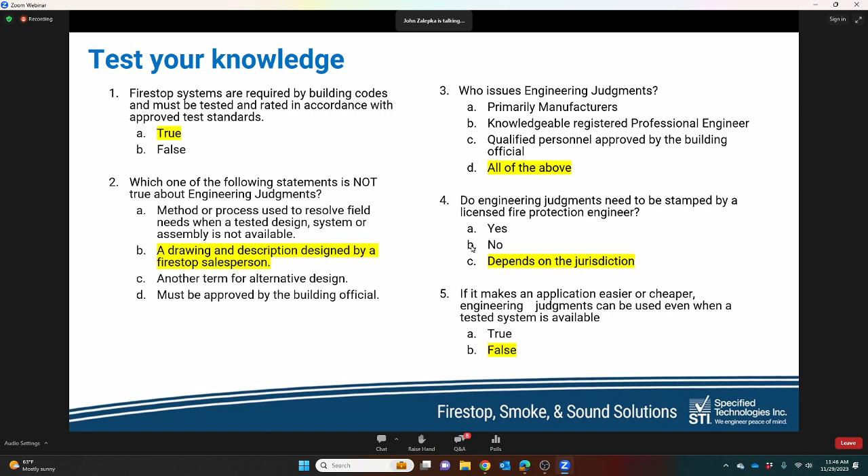So now we're going to get into a couple of questions for our presenter guy here. It looks like Keith has been hitting up the questions.

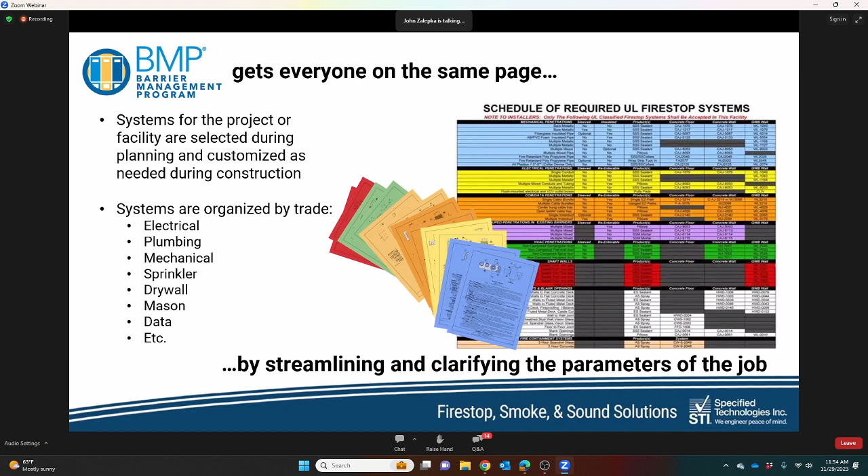So we have barrier management programs. If you're getting ready to launch a new project, reach out to your local territory manager. At STI, we can coordinate your subcontractors if you choose not to use a specialty fire stop contractor, which you probably should. But if not, we can coordinate either analog, old school binders, or even digital. This barrier management program gets all your MEPs and drywall contractors, everybody on the same page. It helps for standardization, allows for better pricing, better training, and just more support on the job. So reach out if we can help coordinate that job for you.